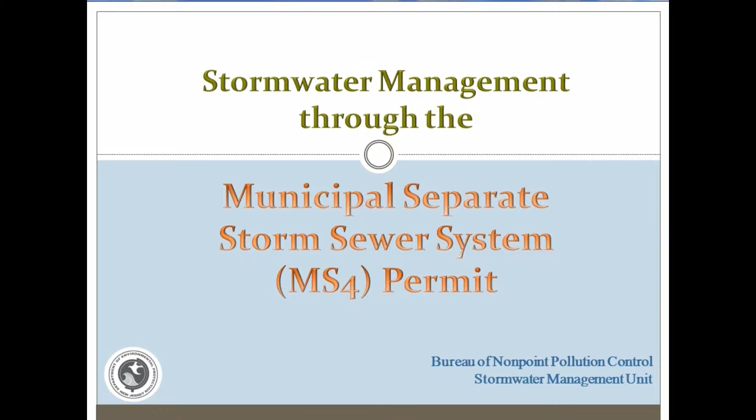The United States Environmental Protection Agency, also known as the US EPA, published their Phase 2 rules in December of 1999. In turn, the New Jersey Department of Environmental Protection, also known as the NJDEP, developed their Municipal Stormwater Regulation Program to regulate the owners and/or operators of municipal separate storm sewer systems through the 2004 New Jersey Pollutant Discharge Elimination System permits, also known as the NJPDES permits. These rules were published on February 2nd of 2004 and were made effective on April 1st of the same year.

The owners and/or operators include local, county, state, interstate, and federal government agencies. The purpose of the regulation is to manage the pollutants entering our waters from certain storm drainage systems.

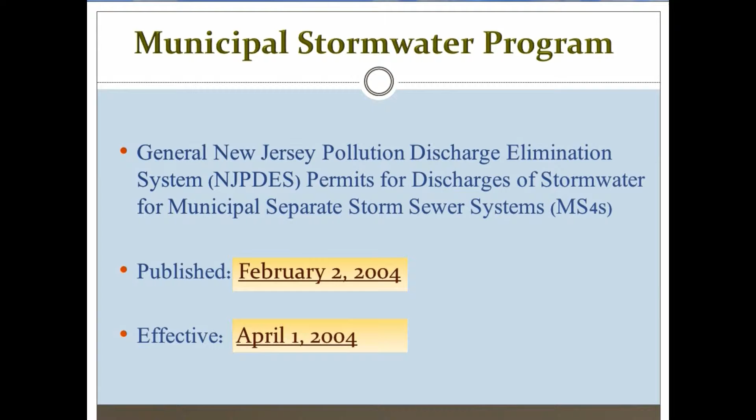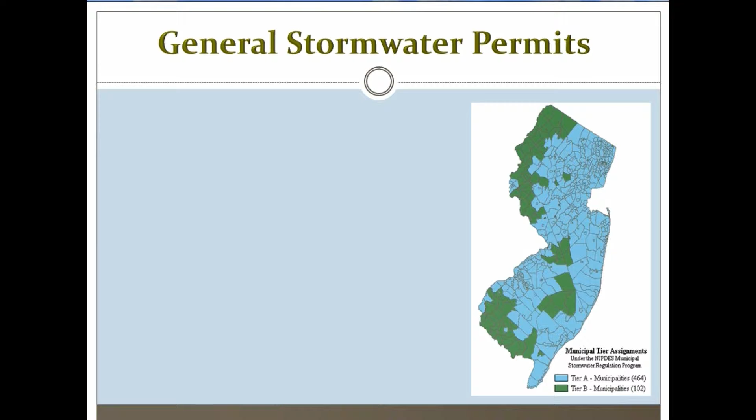There are 4 general stormwater permits that fall within the Municipal Stormwater Regulation Program. The 4 permits are the Tier A, Tier B, Public Complex, and Highway Agency permits. The Tier A permit covers the more densely populated urban areas as well as the coastal municipalities within the state, whereas the Tier B permit covers the much less densely populated rural municipalities.

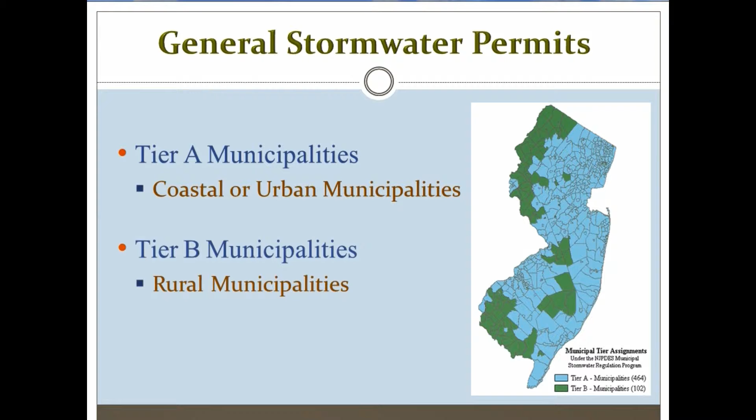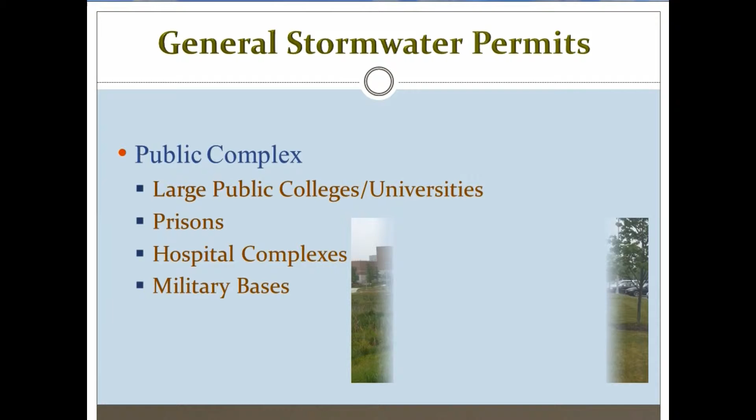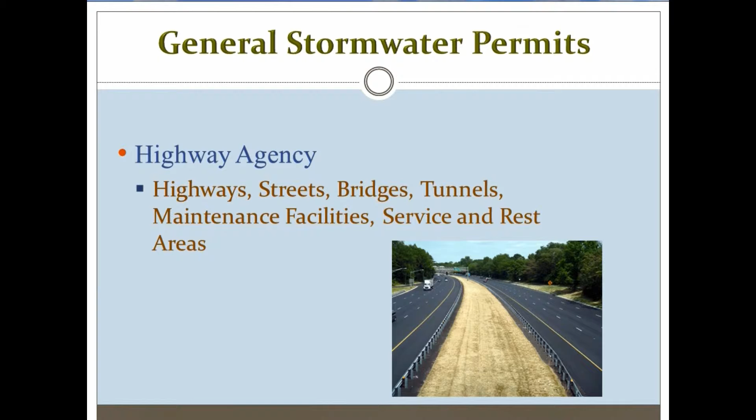The Public Complex permit covers certain large public colleges or universities, prisons, hospital complexes, and military bases. The Highway Agency permit covers county, state, interstate, or federal agencies that operate small MS4s at a highway or other thoroughfare, such as each of the 21 counties within the state or the New Jersey Department of Transportation, just to name a few.

All 4 of the general stormwater permits require development of a Stormwater Pollution Prevention Plan, SPPP, implementation of the statewide basic requirements, SBRs, any additional measures which are defined in each general permit, and the utilization of the new design standard for storm drain inlets.

The SPPP describes the municipality's stormwater program and how a municipality will implement each permit requirement, which includes the SBRs and could include additional and optional measures.

Within the SPPP, there are multiple forms for record keeping and documenting for when the municipality has met various permit requirements. A sample stormwater pollution prevention plan can be found at the NJDEP's website. The more detailed information included in the SPPP will ease the completion of the annual report and certification that must be submitted each year.

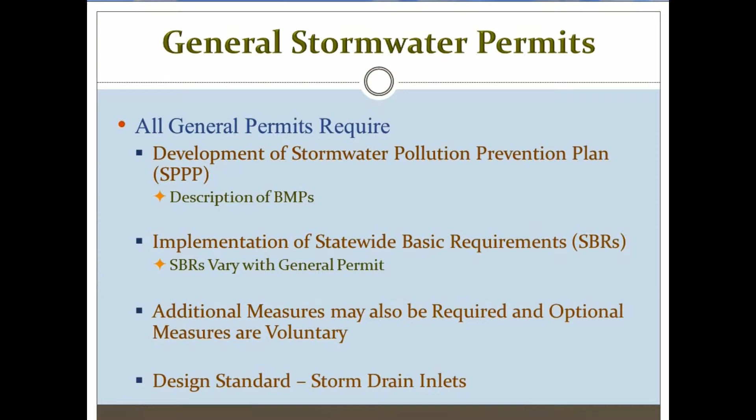The SBR for post-construction stormwater management requires that all permit holders develop, implement, and enforce a program that addresses stormwater runoff from certain new development and redevelopment projects. This is the mechanism that requires that municipalities adopt and ensure implementation of the requirements in the Stormwater Management Rule for municipal plans and ordinances.

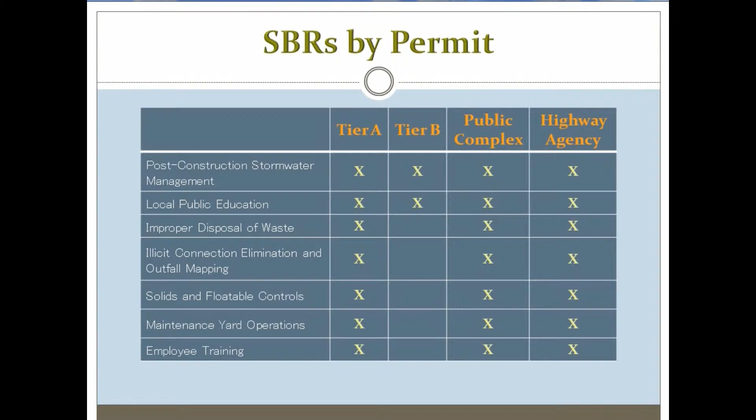This section of the permit also requires municipalities to ensure adequate review and long-term operation and maintenance of the best management practices that are built in accordance with the stormwater management requirements. The Tier A, Public Complex, and Highway Agency permittees are required to meet all 7 SBRs seen here, whereas Tier B permittees are only required to meet 2.

The SBR for post-construction stormwater management requires a municipality to re-examine their stormwater management plan when they are re-examining their municipal master plan. They should also be aware that they are required to amend the stormwater management plan based on any future requirements. This plan shall be made in accordance with NJAC 7:8 subchapter 4.

Within 12 months after the adoption or amending of a municipal stormwater management plan, municipalities must re-adopt the Municipal Stormwater Control Ordinance. This ordinance will control stormwater from non-residential development. The plan and ordinance shall be submitted to the appropriate county review agency for approval.

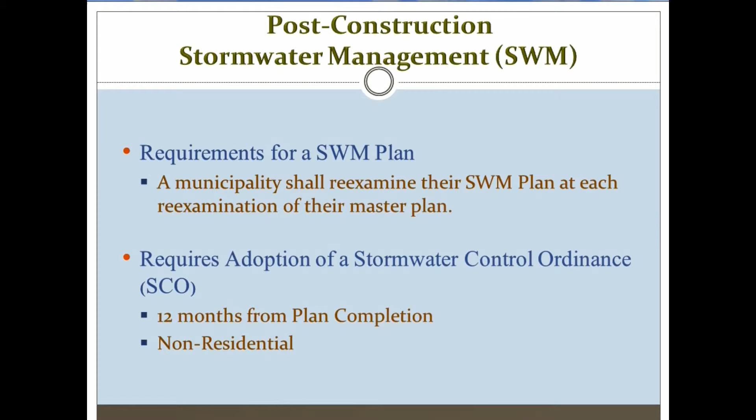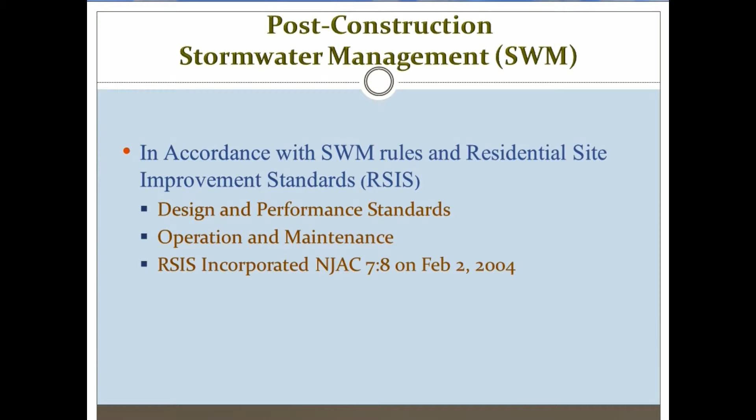Compliance with the Residential Site Improvement Standards, RSIS, is also a condition of the MS4 permit. The RSIS established statewide requirements for improvements made in connection with residential development and effectively include the stormwater management rules, just as the previously mentioned stormwater control ordinance does for commercial development.

Municipal stormwater management plans and stormwater control ordinances are adopted under the Stormwater Management Act, which is a portion of the Municipal Land Use Law, also known as the MLUL. Any projects subject to the MLUL, such as commercial, industrial, and municipal projects, and also disturbing 1 acre of land or more, are required to be reviewed by the municipality in accordance with the stormwater management rules.

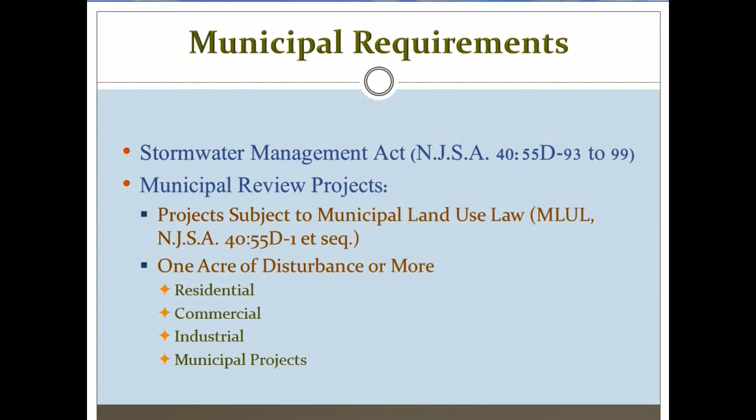Any projects subject to the requirements in RSIS, such as residential projects, and also disturbing 1 acre of land or more, are required to be reviewed by the municipality in accordance with the RSIS, which, as previously mentioned, incorporates the stormwater management rules within it.

Municipalities are required to ensure that all stormwater best management practices, BMPs, are reviewed, constructed properly and as designed, and maintained in accordance with the stormwater management rules, as well as the BMP manual.

In order to grant a variance or exemption from the design and performance standards, a mitigation plan must be in place that identifies what measures are necessary to offset the deficit created by granting the variance or exemption. The plan shall ensure that the mitigation is completed within the drainage area and for the performance standard for which the variance or exemption was granted.

Schools are exempt from the stormwater management rules unless a land use permit is required.

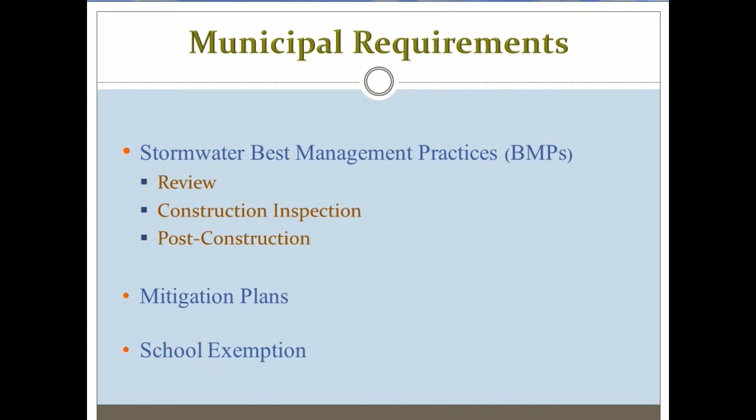Public complexes and highway agencies are required to implement and comply with all requirements of the stormwater management rules. Projects are to be reviewed with the same requirements as all other permittees. The only difference is that these entities are self-regulating. Both are still required to ensure that BMPs are reviewed, constructed properly and as designed, and maintained in accordance with the stormwater management rules as well as the BMP manual.

Retrofitting of existing storm drain inlets to meet the standard identified in the permit is required where such inlets are in direct contact with repaving, repairing, reconstruction, or alterations of facilities owned or operated by the permittee, as well as in any new development or redevelopment.

The option for grates in pavement or other ground surfaces is to use the New Jersey Department of Transportation bicycle safe grate, or to use a different grate as long as each clear space in the grate is no bigger than 7 square inches or no bigger than 0.5 inches across the smallest dimension.

The option for curb opening inlets is to use an inlet whose clear spaces are no bigger than 2 inches across the smallest dimension or no bigger than 7 square inches.

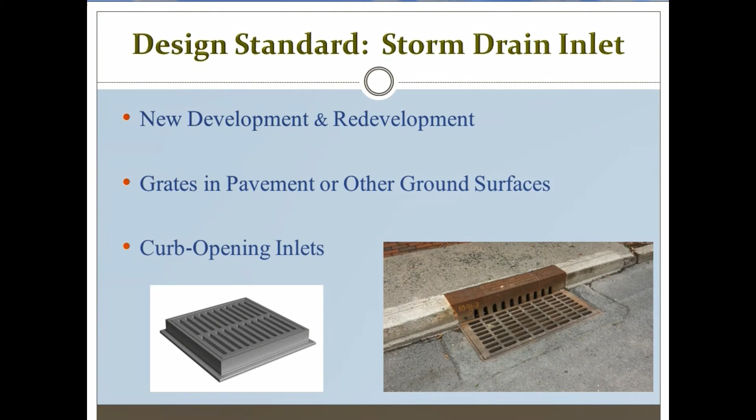There are 4 exemptions to the storm drain inlet retrofitting requirement. These are identified as the retrofitting, historic places, alternative device, and hydraulic performance exemptions. The retrofitting exemption is for any project that began construction or was awarded a bid prior to March 3, 2004. It also exempts existing curb opening inlets that have a clear space no larger than 9 square inches.

The historic places exemption is for situations where action to meet this standard constitutes an encroachment or will damage or destroy a New Jersey Register listed historic property.

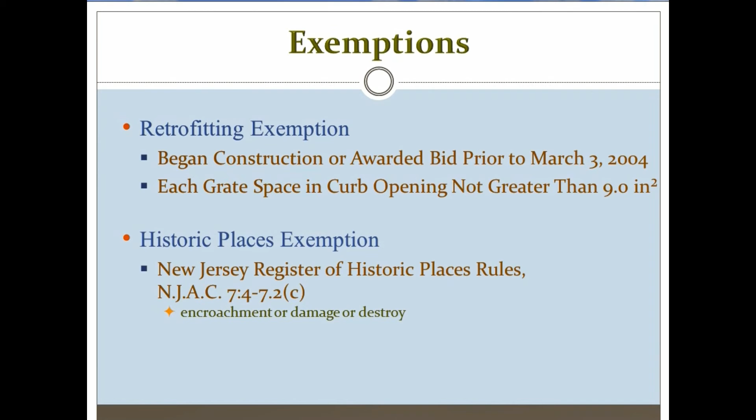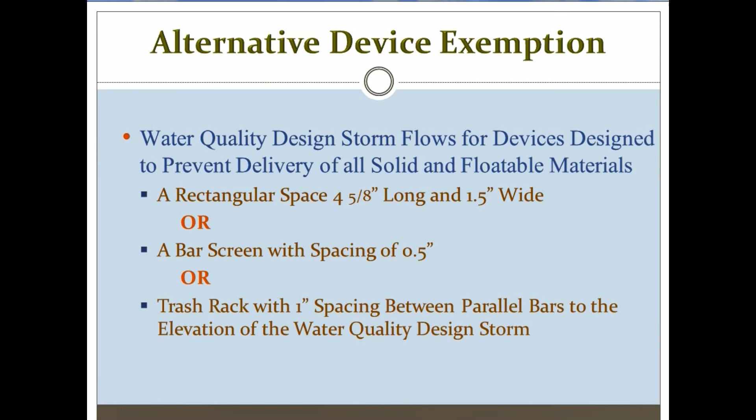The alternative device exemption is for situations where flows are already conveyed through a device that meets certain standards to prevent the delivery of solids and floatable materials. These include a rectangular space 4 5/8 inches long and 1.5 inches wide, a bar screen having a space of 1/2 inch, or a trash rack with 1 inch spacing between parallel bars to the elevation of the water quality design storm.

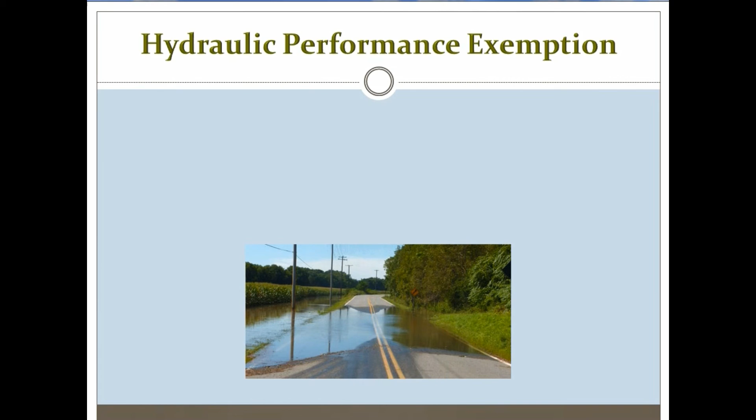The hydraulic performance exemption is for situations where the municipality determines that the standard would cause inadequate hydraulic performance or flooding. This includes new development and redevelopment projects as well as the retrofitting of existing storm drain inlets.

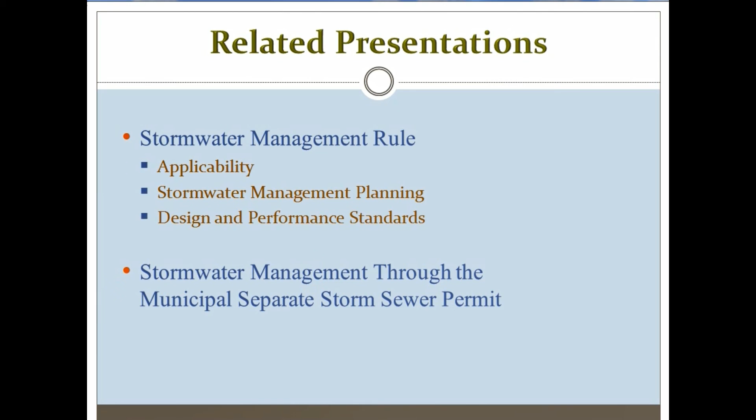Thank you for watching the Stormwater Management through the Municipal Separate Storm Sewer Permit presentation. For more information, please watch the videos in the Stormwater Management Rules series, which include applicability, stormwater management planning, design and performance standards, and safety standards for stormwater management basins.